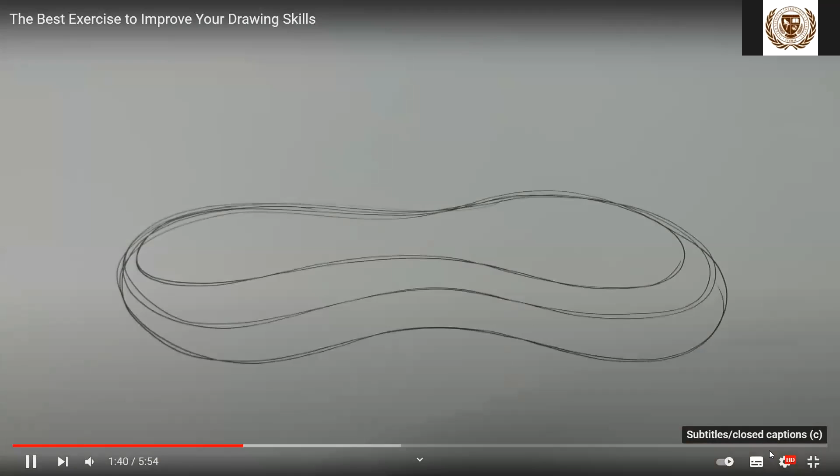It doesn't really matter what you draw, I'm just inventing this one as we go. The important thing is that your lines are continuous, not broken, nice and long. Let's add some holes, one on each side. Even these ellipses are made with continuous movements.

And I will shade the holes. The shading will be with short lines, but even these go from one end to the other. Don't stop in the middle, be decisive. Let's mark the cast shadow with one continuous line, and then shade it with parallel lines, which is also part of the exercise.

And I will darken the area of the shadow close to the object. Good, and we can add some more lines, as if it had an aperture or two, just to practice making more lines.

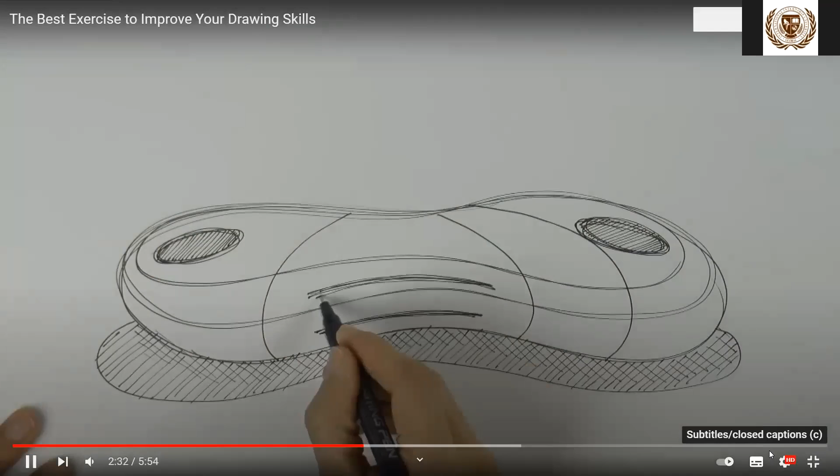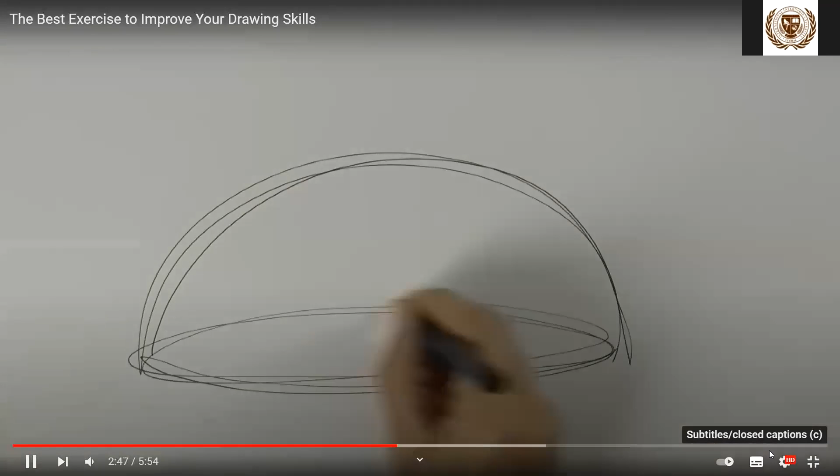Alright, let's get another one. Now a big curve here on the top, as if it were a dome or something. It really doesn't matter what you sketch. The important thing, again, is that your lines are continuous, that they are flowing, that you don't stop in the middle of a line.

Let's make some in another direction, like this, and we can reinforce the base, sketch the cast shadow, and fill it in.

Let's also shade the hole on top, like so. And I'll sketch something else over here, such as a glass or something like that, with two ellipses and then the sides.

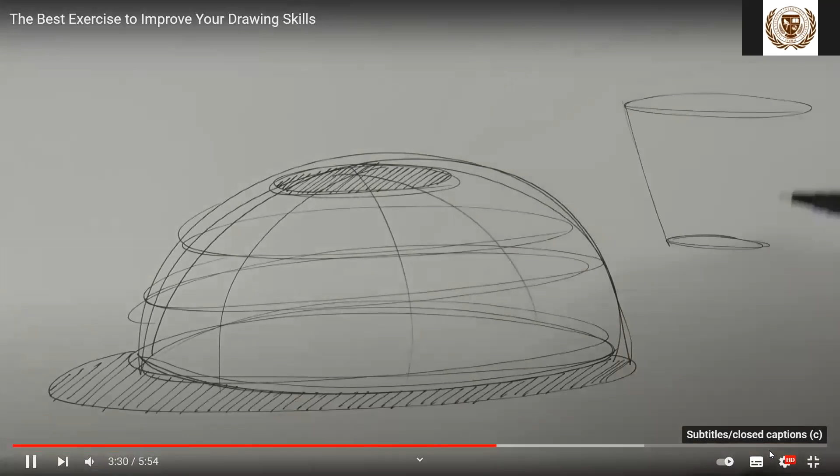So simple, but clean. And just for practice, let's draw some planes: 1, 2, and 3. By doing this, soon you will feel how your hand starts loosening up.

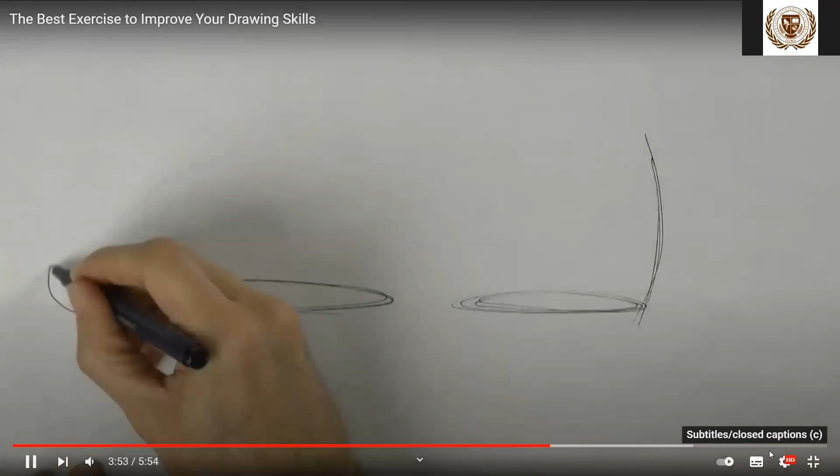Now I will draw a shoe, with two ovals, the end, and then a line for the overall shape, with an oval on top. This of course is not a real shoe, I am making it up as we go. We are just practicing making continuous lines, like this.

Good, now let's think about a futuristic vehicle. Very aerodynamic and with long continuous lines. Again, this doesn't need to make a lot of sense. What is important is that your lines are fluid, continuous, clean, not erratic.

Let's shade the windshield, add an air intake, a flap or wing over here. Very good.

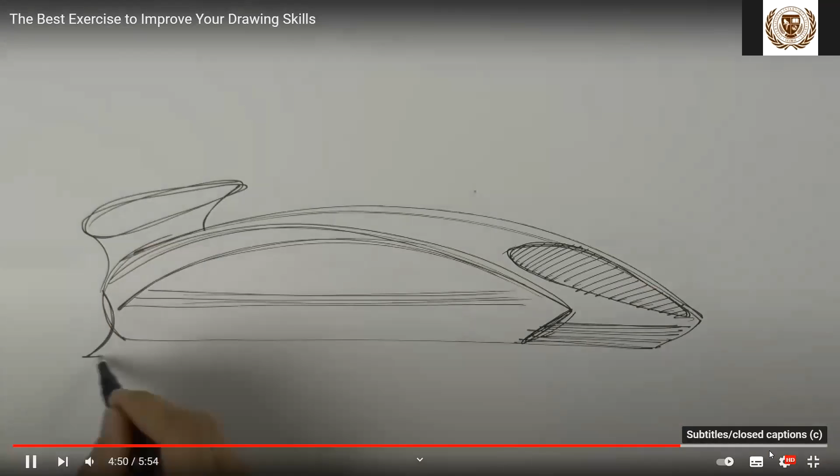Everything with loose, continuous lines. We can shade this, add something over here, and maybe redesign the lower part of it. I'm just playing around to practice making these smooth lines. I'll darken this further. Good, I think you get the idea.

Let's just make one final little sketch over here of a yacht. Of course, it is important for these lines that you hold the pencil or pen softly, not tight. And as we mentioned, do the movement with your whole arm. I recommend doing these exercises daily for a few minutes, maybe as a warm-up before you draw, and you will very soon feel the difference.

That is important, what we are starting on Monday. And because of that, we are making our works, if you remember, like this. We draw the line from top to bottom, horizontal, not like this, we move, and for 45 degrees. And we make a grid, and I told you, please, can you color in that part here? That is fine dimension, very detailing, etc.

Because of that, it's warming up our graphomotoric skills. And everybody in the world, if they want to be designers, they have this first activity. This is the first normal sketches as a child, then graphomotorics, and then coloring, because our brain works with colors. What's next? Research the market. We will see what is the best requirements for when you start designing, before designing, what we are doing today.

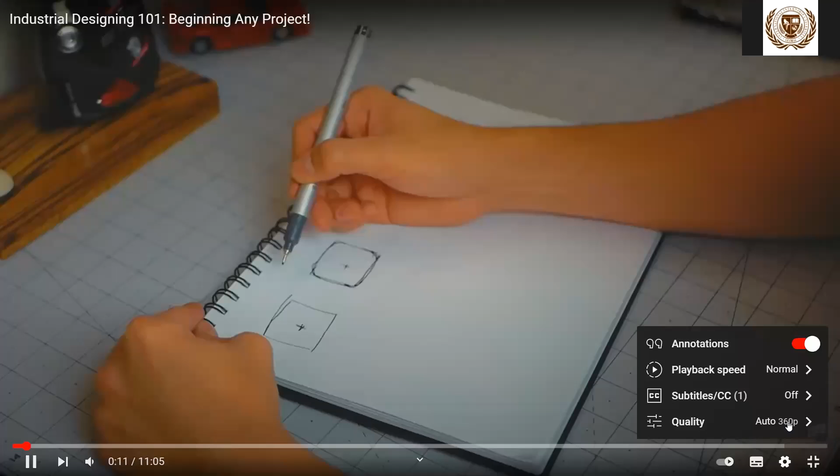Designers, I am showing you the full industrial design process by designing a fan. I'm going to be going through all of the different phases of industrial design and taking you along with me. Towards the end of this video, I'm going to go over the requirements, the constraints that we're going to need to stick to when designing this fan.

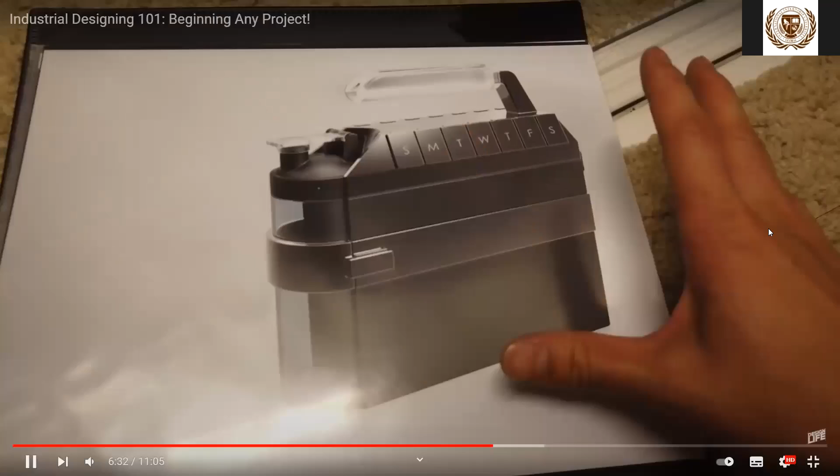This is the normal one, the black on gray silverish one, and then also black on red, because who doesn't love black and red? And then here's a close-up of the pill case. So what you do is these clip on and then you could just pop them up. There's the hero shot. Everything is shut. This is what you would normally see on an everyday basis. What I should have done too is also put it in a background, maybe the gym in the background, and it just kind of ties your product together in the context that it will be living in.

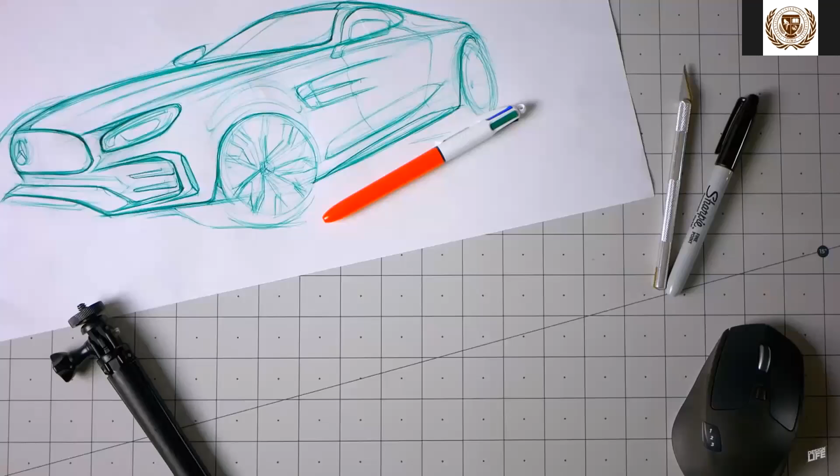Now, the 5 things that I really need to know before I begin a project are, number 1, the timeline. How long I have in order to work on this project. I need to know how long are they giving me. Since I've been doing it for a long time now, I kind of know how fast I work and the type of work that I can expect to produce within a certain amount of time.

Okay, number 2 is cost. Money and time go hand in hand. So I need to know how much money they're expecting this product is going to be. Is it a $100 item, is it going to be a $1,000 item? Is it going to be high end? If they tell me, oh, this is just going to be a very simple low budget product, I need to know this so it kind of narrows down the possibilities of what this project is going to be.

Then the competition. I need to know what are the other competitive products out there that they're looking at, that they think are actually really good, that they might want to add some features of into our product. I want to hear the things that they like about the competitors, the things that they don't like about the competitors, so that I know what to do and what not to do.

All of them are really important, but to me, when it comes to what to expect as far as design, vision is the most important one. I want to know what the client, what the boss is expecting. Competitors really help with that. It really tells me what they like and what they don't like. But I like to ask other things, such as their personal style, the different products that they like, certain things that other companies have done that they really admired. These are the things that I want to know in this vision category. I really just want to narrow down what they specifically are expecting.

Something that's very elegant and beautiful and glamorous, or something that's very bold and edgy and sporty and fast. A lot of the times they don't know, and that's a good thing to know too. If they don't know, then that means it's up to you to contribute. And we all know that a product can go in every single direction. It can be bold, it can be subtle, it can be very trendy. And my philosophy is that you need to be a really good listener. Hear the things in between the lines so that you can increase your chances of success by giving the person exactly what they're looking for, or maybe even more.

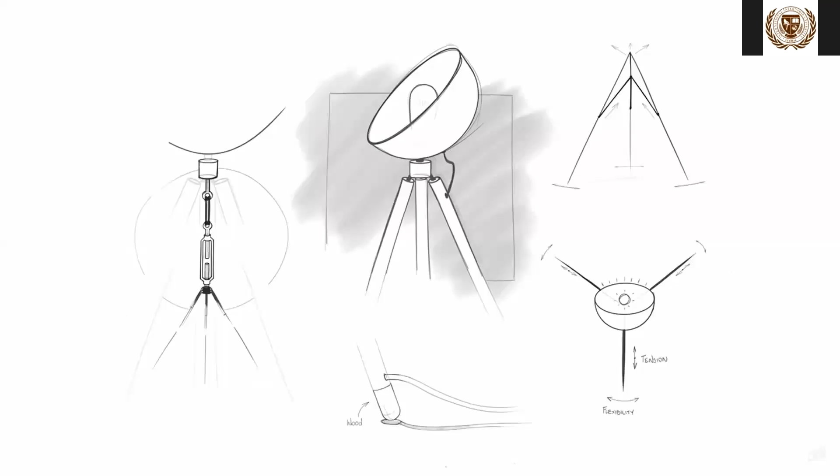A lot of people like to see just the different ideas that you actually considered. They decided to sketch in gray too, and personally I sketch in blue, so you don't always have to feel like you have to sketch in black. This is another great way to show off your sketches, is to just take a picture of it at an angle and maybe just have your pen in there instead of just scanning it in like this example. But either way works. It's really just up to you.

And I really like this sketch right here because most people think that in order to draw a good sketch, you've got to kind of overcomplicate it and add a lot of detail, but this is really simple, straightforward. I can understand it right away. Being able to sketch well and quick is really about mastering how to draw the very basic geometric shapes, stuff like pyramids and spheres and cubes and cylinders. Because if you carefully observe products, most of them are based off of these forms. The general form of the product is based off of these primitive shapes.

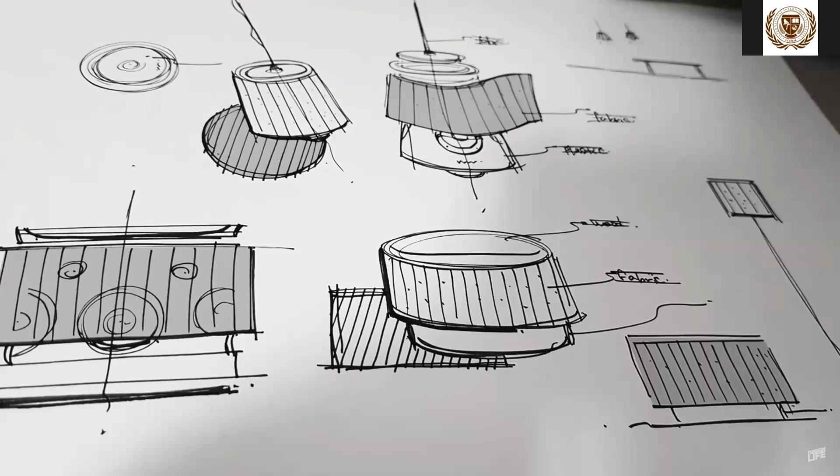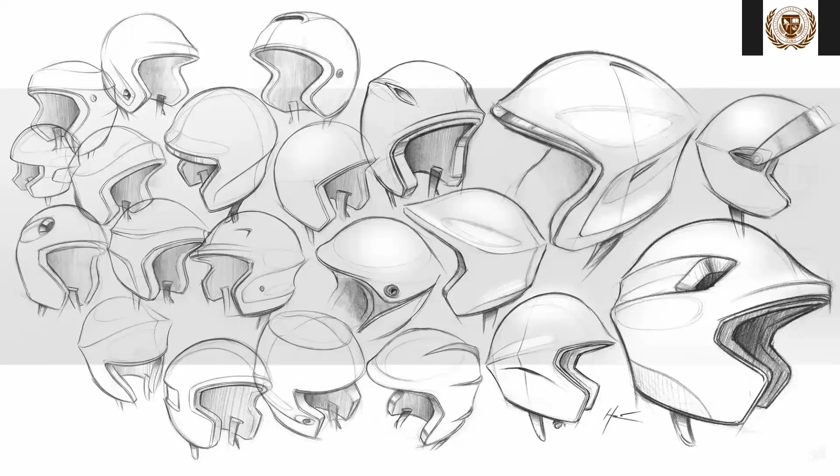So now with tablets and sketching apps, you don't have to draw with a pen and paper. You can do it digitally. And I think this is a great example. Again, it shows off the straight-on orthographic views like I talked about. And I really like it too because you can just render in really quick, just like a marker, and it just adds so much more to the sketch. So this is a very standard way of showing off your sketches.

You know, you just have a bunch of sketches, you scan them in, and you compose them all together. And it gives you a really cool looking page, but I gotta tell you guys, if you're gonna be doing it this way, it's gonna be very time consuming just because you gotta scan everything in, you gotta remove the background, and you gotta compose it all together. And the hardest part of this one is to just make the background completely consistent color. Kind of like this one here where they scanned everything and composed it.

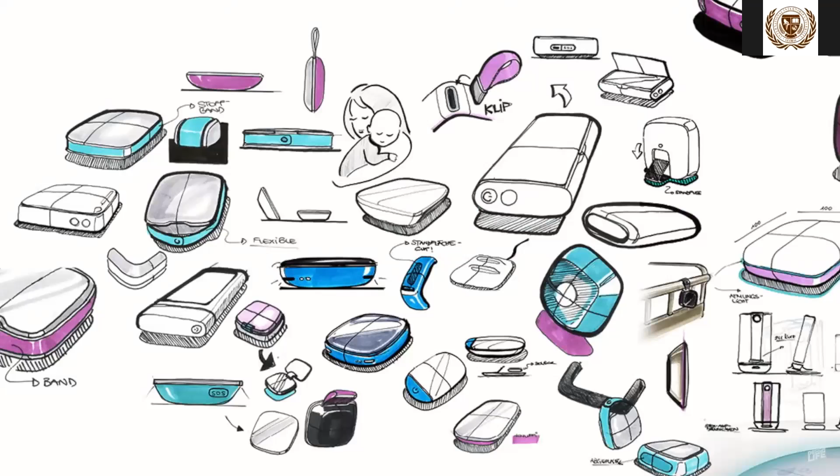I like this one just because they have 3 different groups, kind of telling me that, oh, they design things in phases. And I liked how they render things every once in a while, kind of just showing that they're experimenting with certain ones, they're trying to explore ones a little bit further.

So this here is just another simple digital sketch, but what I wanted to focus on was the industrial design style. What we tend to do is we like to draw the lines even past the object, and it just kind of adds a little more style to it, a little more emotion, and it's a great idea to develop your own style and stand out from the crowd of industrial designers, but always again keep in mind that sketching is all about trying to be as clear as possible to represent your ideas. Just don't go too overboard with it, because that really defines the industrial design style versus, say, an artist or an illustrator.

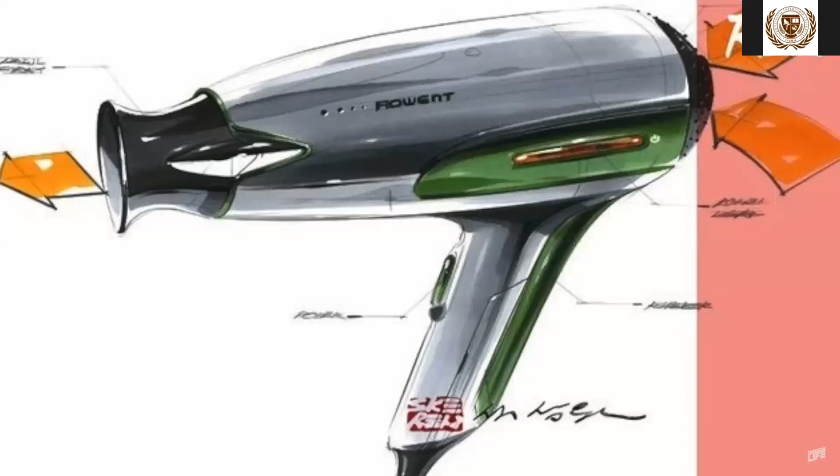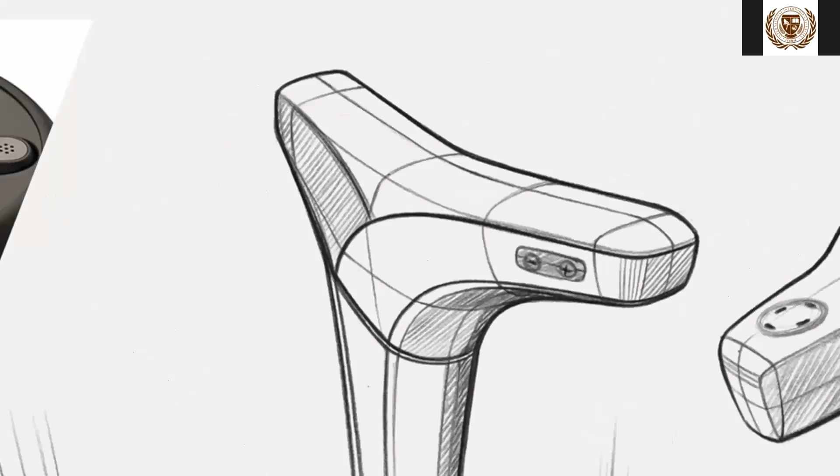So since we're on the topic of style, I love looking at Skeren sketches, and you guys can see that there's a specific style to it. It's very expressive and emotional, but at the same time, you could still understand the forms and what the product is. And honestly, that's the main reason why I like looking at designer sketches over any other type of style, just because the designer and the sketcher has really considered the form and showing it off as clearly as possible. Just like what you guys see here, they also use contour lines to really help show off that form. Definitely something that you guys can use.

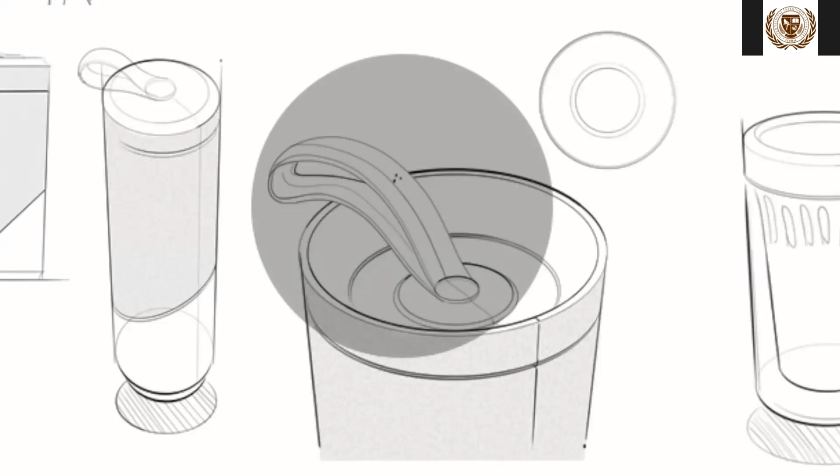So this sketch and presentation is actually very interesting to me just because, you know, it's very common for us to bunch in a ton of different sketches in a small area. And so how they were able to have things stand out or have the viewer focus on a certain detail is that they spotlighted certain aspects of their sketches, which is definitely something that you guys can also do.

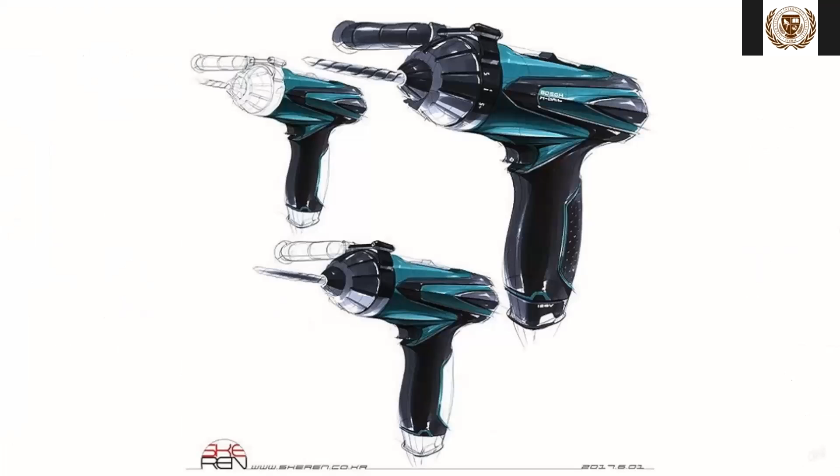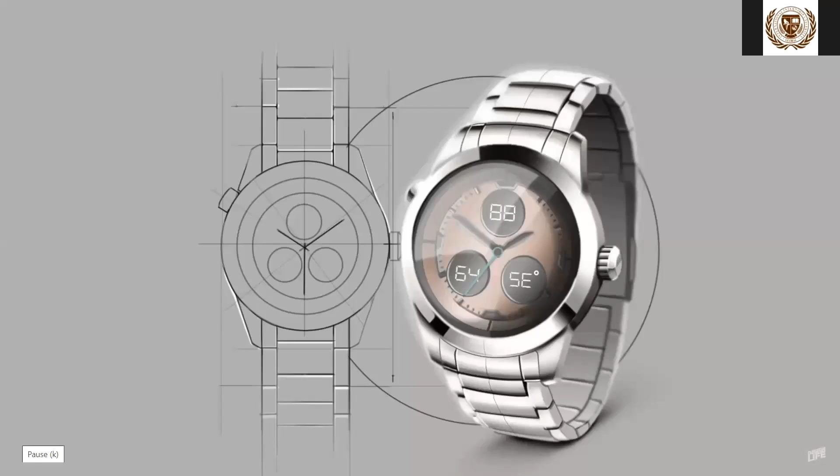So I'm going to wrap it up right there, guys, but sketching is such a huge topic in industrial design, so there's probably going to be a part 2 and a part 3. Main thing I wanted you guys to take away from this video is to crush that idea of trying to draw a pretty picture. That's not going to make you a good designer. You're totally missing the point if that's what you're trying to do. Sketching is such an incredible way to show off your ideas in a very fast and quick way. It's kind of like when somebody writes something down to figure out their thoughts. You're trying to sketch your ideas out, trying to figure them out, work through your designs, figuring out what's it going to look like, how's it going to work.

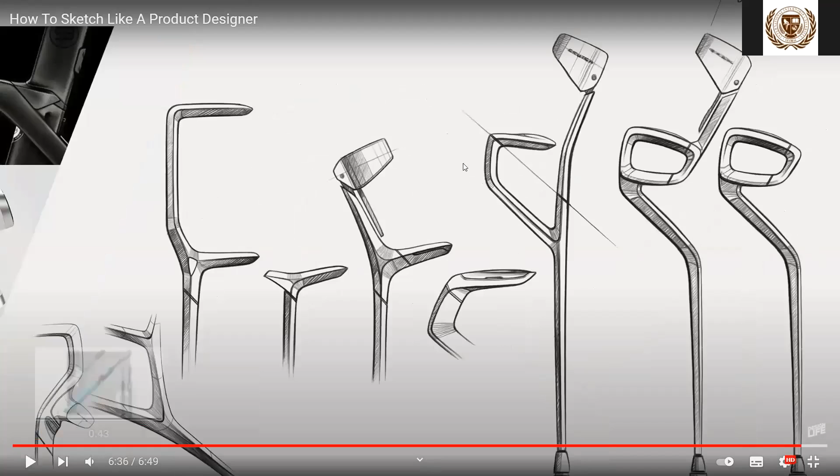Definitely. And because of that, you must warm up your hand. And because of that, you must work every day, not just listening, because industrial designers and product designers work every day. They practice every day. They sketch in the tram, they sketch in the waiting room at school. They sketch all the time. They have lots of papers of sketching.

And here, wait a minute. Yes. Here. Oh, I think, okay, sorry. I clicked some other buttons.

Here, we make a sketch of the project, revealing its essence. Seek a color decision, properly balance the composition. We speak in visual elements. Display any shape and material that we research in the market, and create bright and expressive sketches. And you must sketch every day, not just "I will start next Monday." Convey information to the viewer, show the color scheme of the project. We made the color scheme in a mood board.

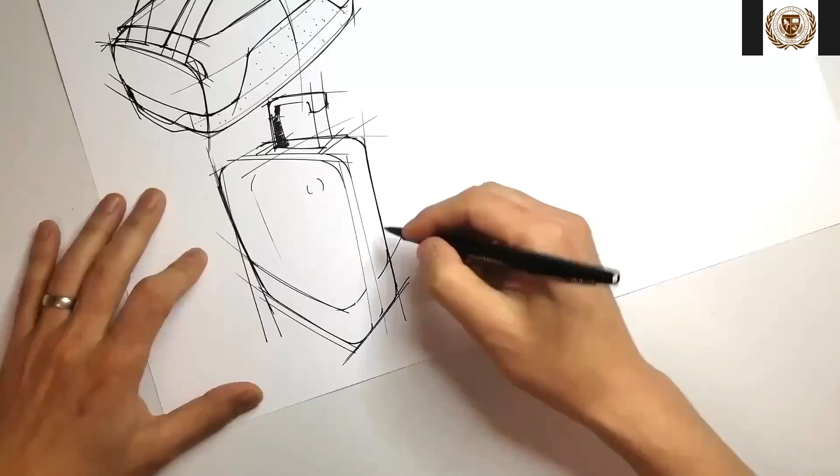The sketches are very loose and mistakes are everywhere, but that's okay, since the main purpose for these drawings is for me to communicate my ideas with other designers. For example, the marketing department communicates with their customers by using words, and the accounting department uses numbers to communicate. And designers, we use drawings to communicate. So simply, drawing is a tool that we can use to communicate with other people.

We have a 10-people design department, and we show our drawings and ideas to each other every day. You don't have to have perfect sketches. Chances are you will most likely revise your drawings and ideas after a meeting or talking to other designers anyways.

But the one thing that I have to keep in mind is that people react to your drawings first, and then they will look at your ideas. So if there's something wonky going on with your drawing, or if the perspective lines are incorrect, people will focus on those mistakes instead of your ideas. So even though I said that concept sketches can be very loose, I will try to make them somewhat presentable.

So once I am done with step 1, I will try to pick my favorites and then move to step 2. So step 2 is my design variation stage. Once I review the first concept sketches with other designers, I will make variation sketches based on my favorite concepts.

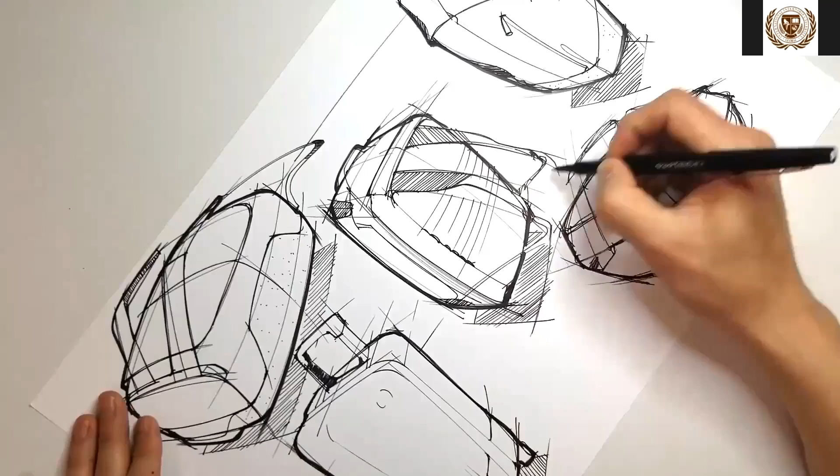Sometimes I will freehand those variation sketches, or I will use a computer to make more options. The main difference between step 1 and step 2 is that step 2 variation drawings are not that different from each other, since these are based on a selected concept, and just small tweaks are made to narrow down the concepts. And I'm also working on potential components and materials that I can use for the production during step 2.

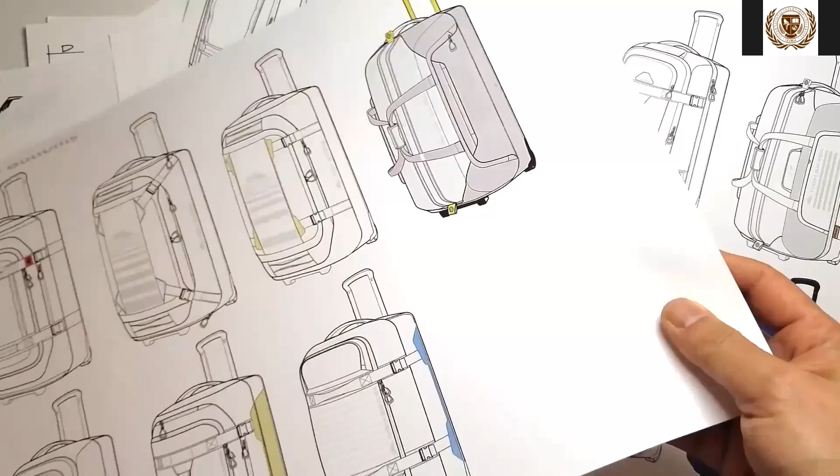So once I select like 2 or 3 final concepts from step 2, I will move to step 3. Step 3 is a final presentation. I will make more refined renderings so I can present them to upper management or our buying team. So once I have a green light to move forward with the production, I will move to step number 4. Step 4 is a specification.

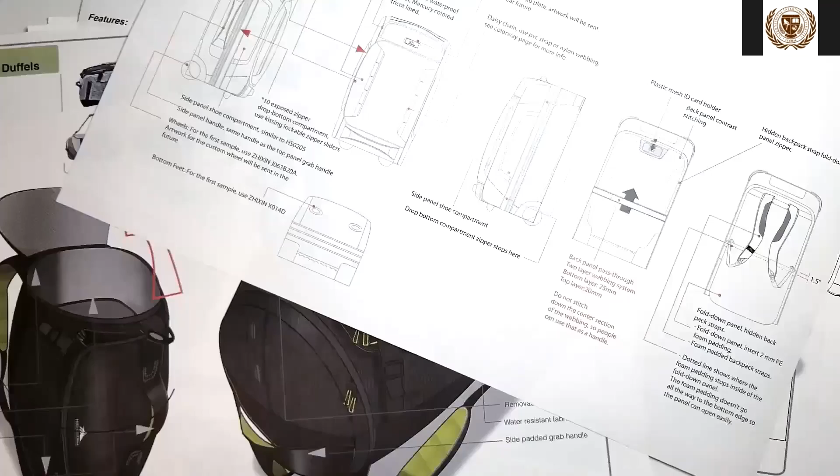This is where I use my drawings to communicate with our overseas factories. And these are engineering drawings with orthographic views, detailed specs, and components list. So after these drawings are sent to our overseas factories, about 2-3 months later, I will get to see our sample. So sample is step number 5.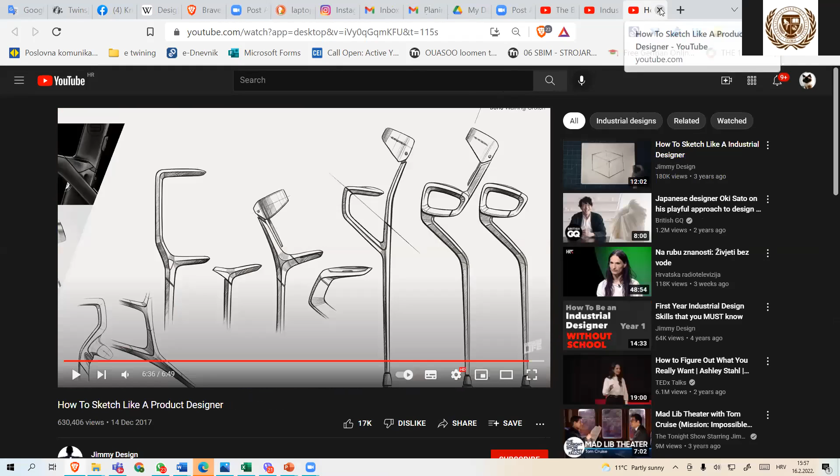That was our task today. How to draw and what are the rules. Welcome back to another Industrial Design Fundamentals. What are the rules and what is most important to put in your drawing. It can be from a child's design. It's no problem. But if you don't put any information for the producer... here, you see, those are components of travel lights.

And here, if we read that design, you will see it comes in 4 different colors. Bendable neck, okay. A 2 in 1 phone charger you can have here, and that is a holder for your lamp. Here, how you connect the removable piece with magnets. You see, here is the magnet, and you have an explanation of how the product works.

Do you know how old this product designer is? 11 years. That girl goes to 7th grade, and she made that in 3 days. That is amazing. She has the power to sketch, to research, to make all this in 3 days. Excellent. And she thinks with all different resources. How can she make this? 2 ways of charging, with a solar panel and plug and play in walls. And it's designed for trips, camping, travels.

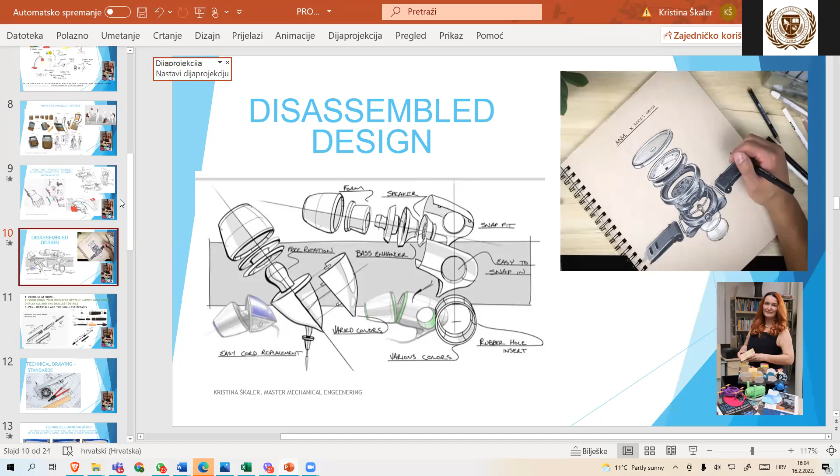Exercise time. You will make your drawing, exploding your upcycle laptop table and all its functions, down to the smallest details. Please, that is our today task. Just take the pencil and draw like this.

Here is task two, B. Can you draw the pen near around you? If you don't understand how to draw the laptop table, you can put all these parts away and draw everything on paper with the pencil. It's simple, not a heavy task for those watching our workshop. You can make all this, and that is our second task.

First task, can you make it on A3 paper? On A3 paper, please sketch what your table is. What is inside? Where is the hole? Where is the hub? What material does it have? Do you put LED lights here, etc.?

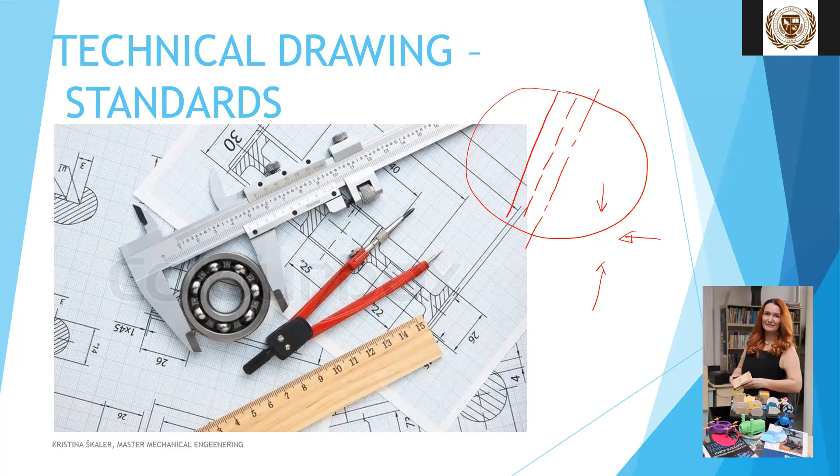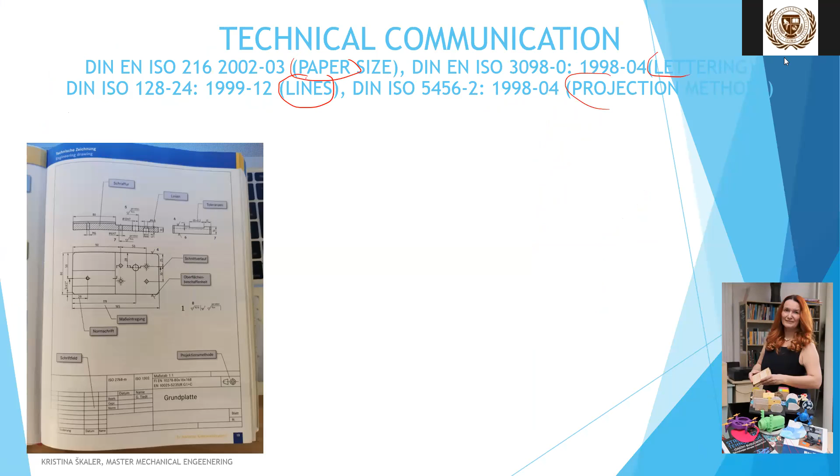We have technical communication standards: what is the paper size, standards for lines, for lettering, projection methods—everybody in the world agrees on these, including schraffur, lines, tolerance.

Here you see what we put on the table for projection methods. Everybody can search the internet for the meaning of each line—what a light line like handwriting means, what a broken line like this means, and the thickness of that line. The designer must know everything about this, because the producer who will make your prototype must understand what you are drawing, and that is important.

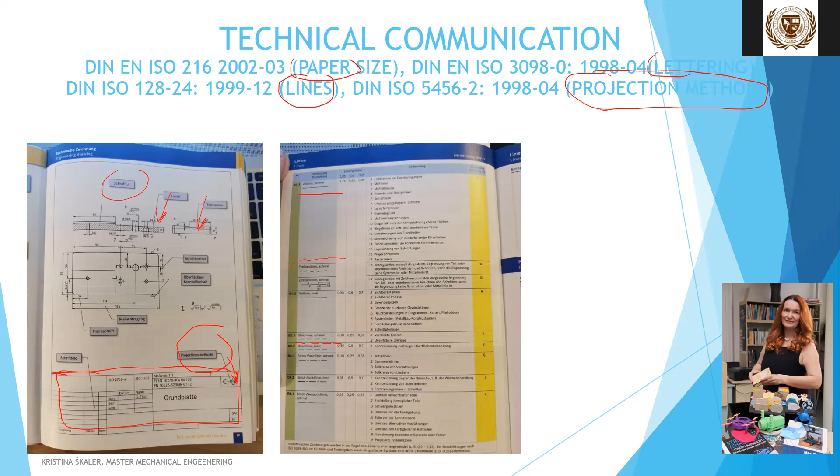Now, what is the view? You see this in YouTube videos with lots of viewing angles, but if we agree on the world scene, what is the top view? The top view goes here. From the top we make it here. From below, if we're looking from underneath, we put it here. Front view goes here. Everything is explained.

Anybody from India, Australia, Malaysia, or Russia looking at something knows where it is on the real product, and they can produce the same thing. If we don't have standards, we will make big mistakes, and because of that, we have standards.

Wait a minute, let's agree on something first: first angle, third angle. First angle projection is used in Europe, maybe Russia. In India it's third angle, or maybe Malaysia. In America and in the UK it's also third angle.

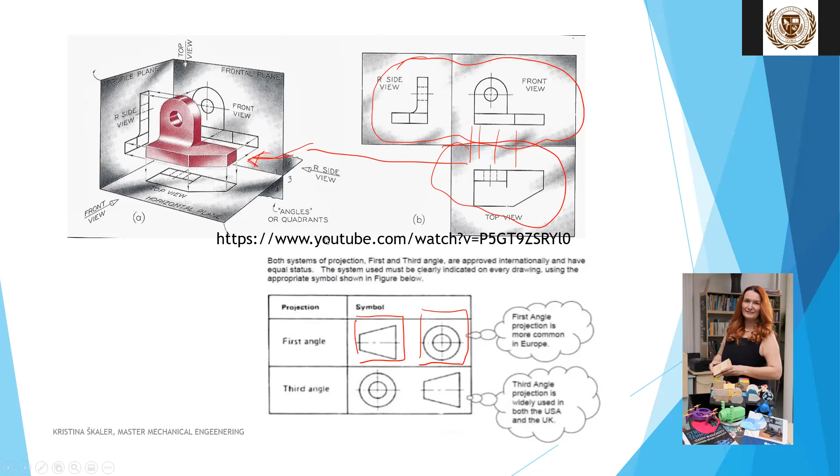Because I have something to show here. We must know the standards of designing, the standards of mechanical engineering, because of that we can communicate across the world. I can produce something with Indian colleagues because we have the same standards, and because of that we can design in Europe, manufacture in China, assemble in India, and sell that product. Because of that, all of us must know the standards.

Here's a beautiful example. What is missing if we don't understand this standard?

Let's get straight to the point. Today we're going to be talking about what is GD&T. Now, if you're in the mechanical design or manufacturing world, chances are you've heard of GD&T, maybe from a classmate, a professor, a coworker, or maybe even your boss. Either way, you're wanting to know more about GD&T.

Before we can really grasp what GD&T is, we first need to understand a few critical concepts. The first concept is this: parts are not really useful by themselves. Now you might be wondering, parts aren't useful? Of course they are, that's why we design parts, that's why we manufacture parts. What do you mean? Well, here's what I mean.

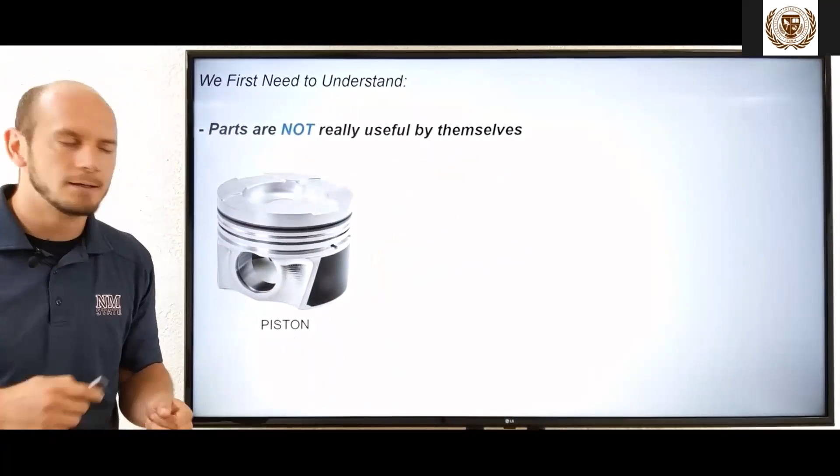Let's take this piston, for example. Let's say I take this piston by itself and just hand it to you. Is that piston by itself really useful? No, it's not. Same thing for this connecting rod and this wrist pin. It's not really useful by itself.

So the next concept we need to understand is this: parts are typically put together with other parts to make a useful assembly. If we took that piston, connecting rod, and wrist pin - all by themselves not very useful - but if we put them into this assembly, now all of a sudden we have something useful. We could then take this useful assembly, put it into a larger engine assembly, take that engine assembly and put it into an even larger vehicle assembly, and now that vehicle, as an assembly of parts, is useful to us. So again, parts are typically put together with other parts to make a useful assembly.

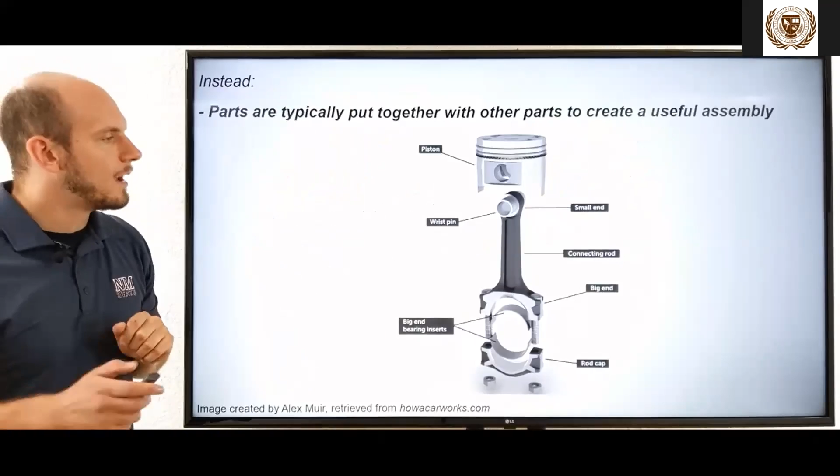The last thing we need to understand: traditional dimensioning and tolerancing that we're all used to seeing and using does not guarantee your parts will fit and function at the assembly level, which is where your parts are really useful. So there's some glaring gaps in traditional dimensioning and tolerancing.

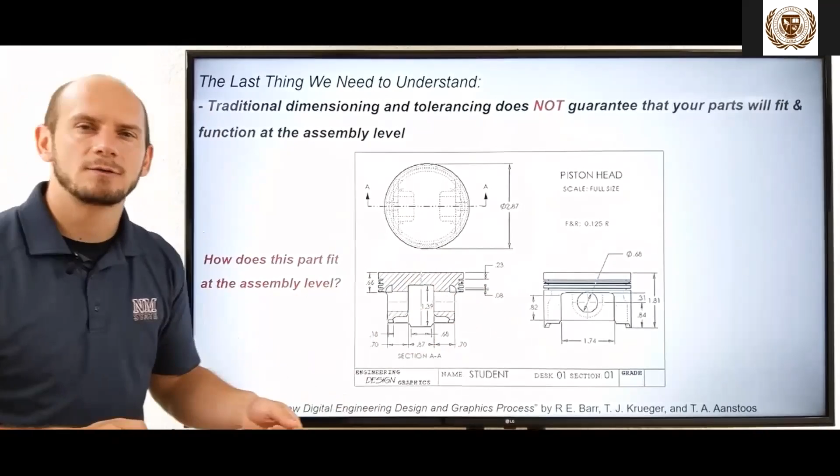Traditional dimensioning and tolerancing, like what you might see on this drawing here, only gives individual part and individual part feature information. It does not tell you how this part fits at the assembly level. Traditional dimensioning and tolerancing doesn't tell you how this part functions at the assembly level. So there's some gaps we need to address.

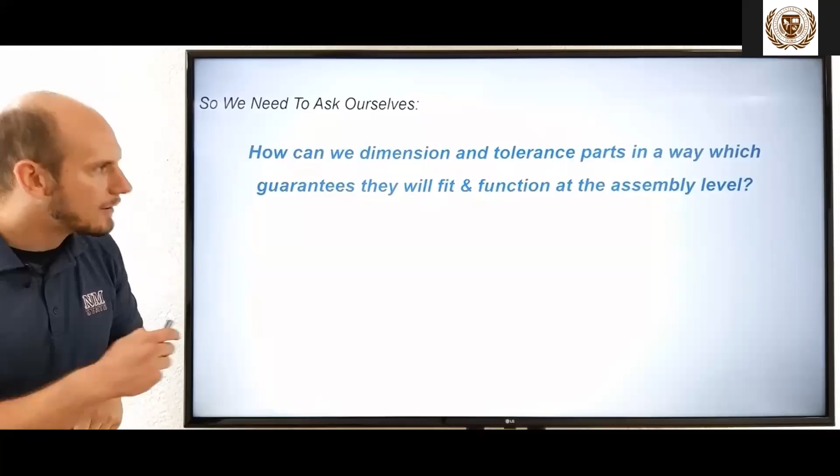So with that, we need to ask ourselves, if traditional dimensioning and tolerancing has some gaps, how can we dimension and tolerance parts in a way which guarantees they will fit and function at that assembly level? How do we do this? By using GD&T.

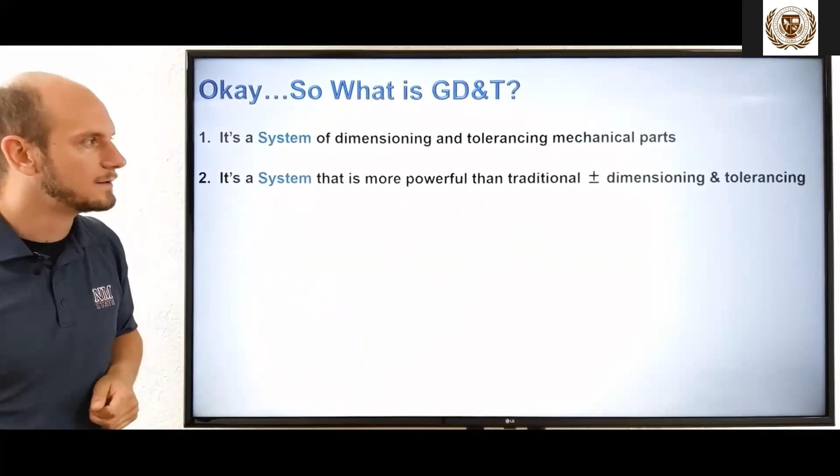So that's what we use GD&T for, but you're probably still asking yourself, what is GD&T? Well, number one, it's a system of dimensioning and tolerancing mechanical parts. Number two, it's a system that's more powerful than that traditional dimensioning and tolerancing we're all used to seeing and using on our drawings. How is it more powerful? Well, it's more powerful because it's a system which allows you to know with 100% certainty that your parts will fit and function at the assembly level.

Number four, it's a system. So of course, with any system, we need to learn some vocabulary, understand some definitions, follow some rules, and then once we do those three things, we can start to apply predefined symbols to the face of our drawing to help convey our design intent for our parts and part features.

And these are some typical or common symbols that you'll see within the GD&T world right here.

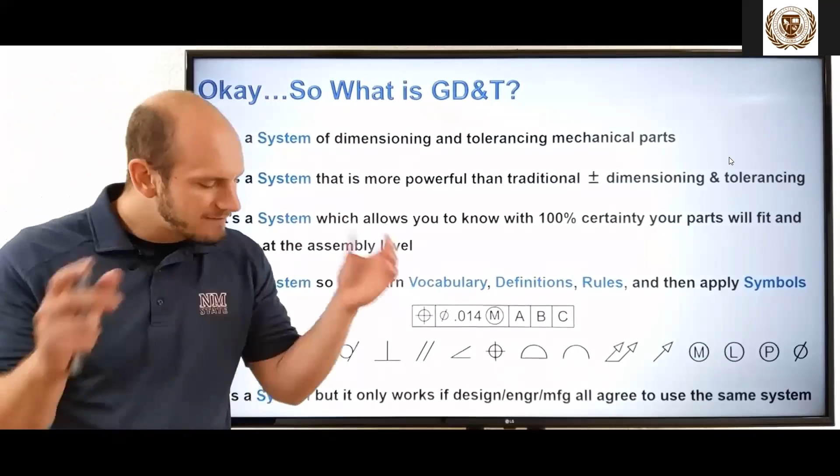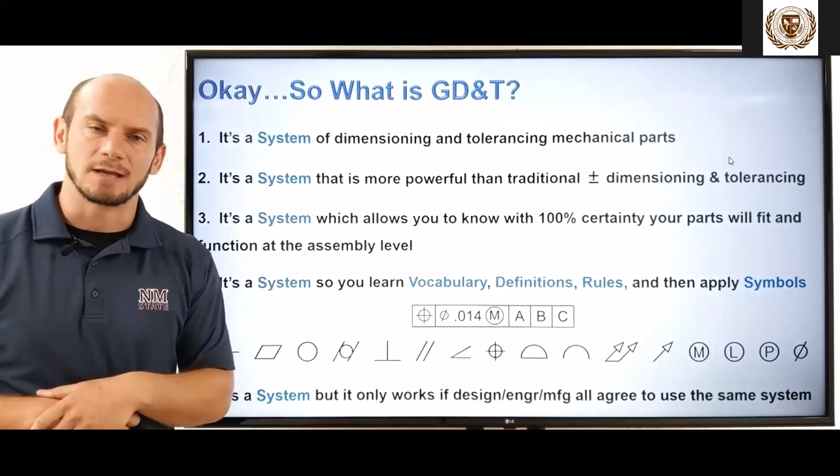All right, the last note here. It's a system, but it only works if everyone involved agrees to use the same system. What do I mean? Well, the design people, the engineering people, the manufacturing people, such as the machinists and the inspectors, they all have to agree to use the same system. If a sports game happened but the teams couldn't agree to the rules, you'd never have a successful game. So it only works if everyone agrees to the same system.

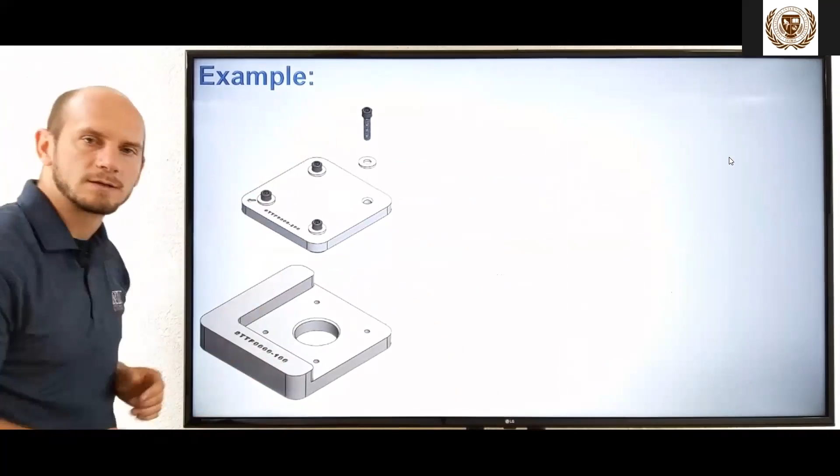All right, let's now look at a practical example. I have this pretty simple assembly. I have a top part and a bottom part, and I've got this hardware holding it all together. Now in this assembly's assembled state, this is what it would look like. Now I want you to notice a few things in this assembled state.

First thing, we've got this interface or mating surface right here, that flat surface where those parts come together. I have another interface or mating surface right there where this top part sits against this ledge. And then I have a third interface or mating surface right there where this part also slides over and sits against that ledge.

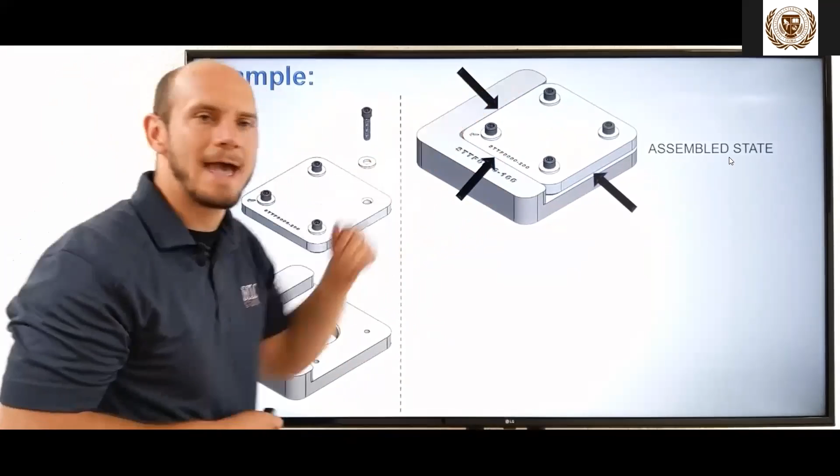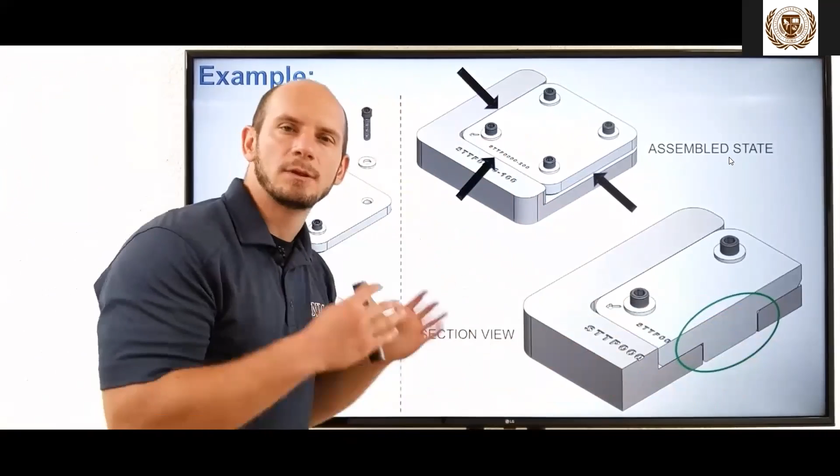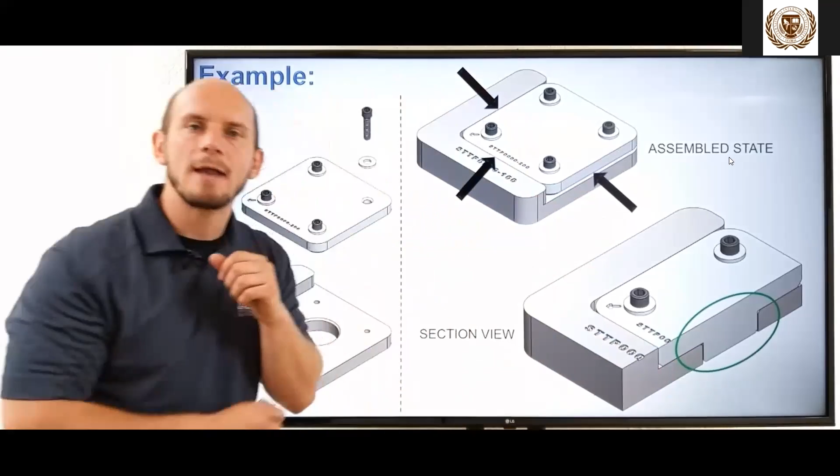Another thing, if I was to take a slice of this assembly and look at a section view, it would look just like this. Now you'll notice in this section view I've got a critical assembly feature. What I mean by that, this extruded boss must fit inside this bore. If it doesn't, these parts will not come together. They will not fit and function properly at the assembly level. So I've got this critical assembly feature and these interface or mating surfaces that we want to look at.

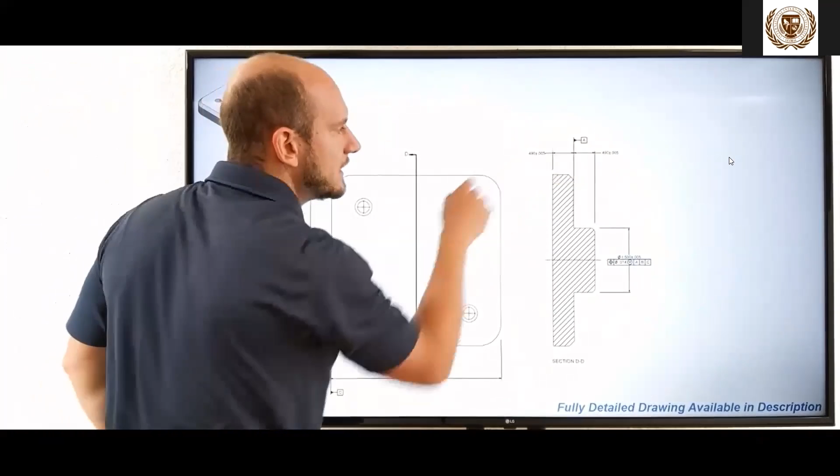So now let's look at the top part. This is some common views you might see on a drawing for this top part. I've got my top view and my side section view. You'll notice I do have some traditional dimensioning and tolerancing here, as over here as well, to denote the overall size. But when it comes to that critical assembly feature, I'm also adding GD&T. By adding GD&T to this critical assembly feature, I'm guaranteeing that feature will fit and function properly at the assembly level. Also, I'm identifying those interface or mating surfaces on my drawing as well.

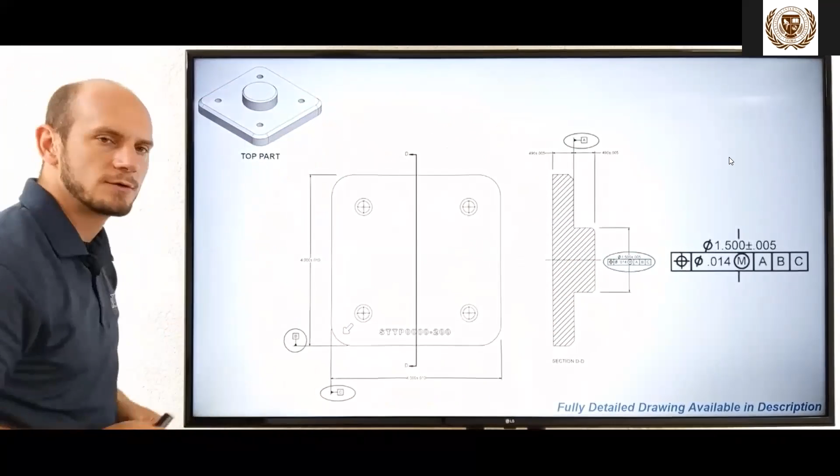Now this isn't all of GD&T, but this is a really brief introduction to the symbols that you'd put on your drawing and what you'd apply to your critical assembly features. And you can see the fully detailed drawings if you look in the description below.

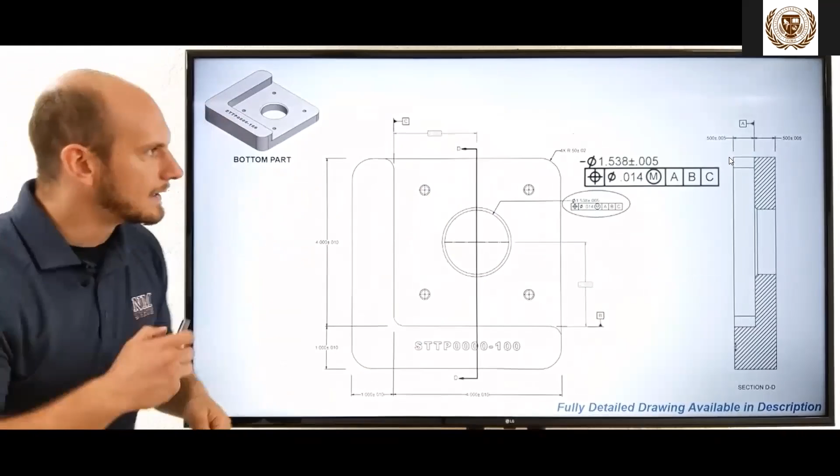All right, really quickly, let's look at the bottom part. Same thing here, guys. I've got that critical assembly feature, which is that bore. And because it's a critical assembly feature, I'm applying GD&T to it. Again, I'm also identifying those interface or mating surfaces on my drawing as well.

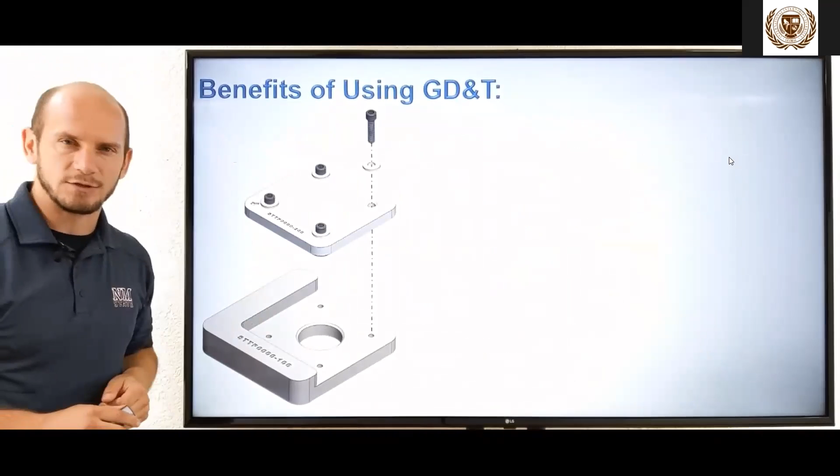All right, so now we know what GD&T is, kind of real briefly how it's used. What are the benefits of using GD&T, or why should I use it? Well, number one, you can be 100% certain that your parts will fit and function properly at the assembly level.

Number two, you're going to save time and money because you're going to reduce the number of design to manufacturing to test fit cycles that you have to perform, because your parts are going to fit and function properly the first time around. The last one, you actually convey your design intent to the machinist, the inspectors, as well as the future designers who inherit your drawings and your designs.

So if the machinist, inspectors, or these future designers pick up your drawings, they can see your GD&T, and right away they'll understand the fitment and the function you want at the assembly level, and they can get rocking and rolling and start to do their work.

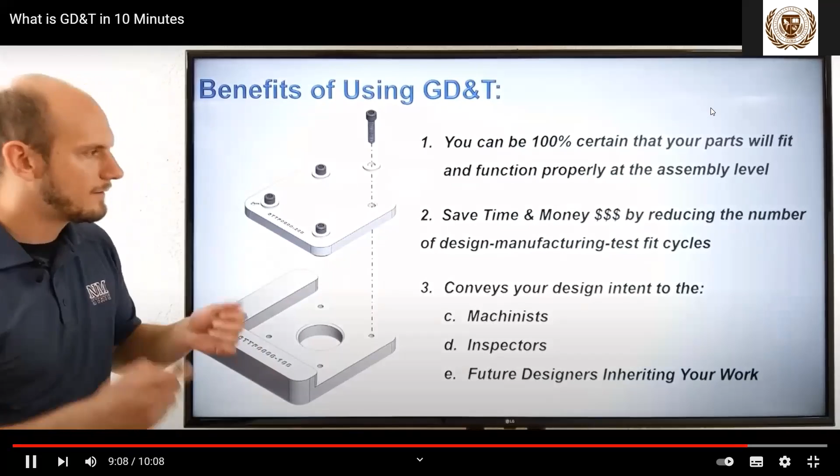All right, those are the three big benefits of GD&T. However, guys, number two, that's your big one. That's your selling point right there. You're gonna save time and money. All right, that's the benefits of GD&T.

One more time, what is GD&T? GD&T, it's a system of dimensioning and tolerancing mechanical parts, which allows you to know with 100% certainty that your parts will fit and function at the assembly level where those parts are actually useful. And it's a system from the American Society of Mechanical Engineers.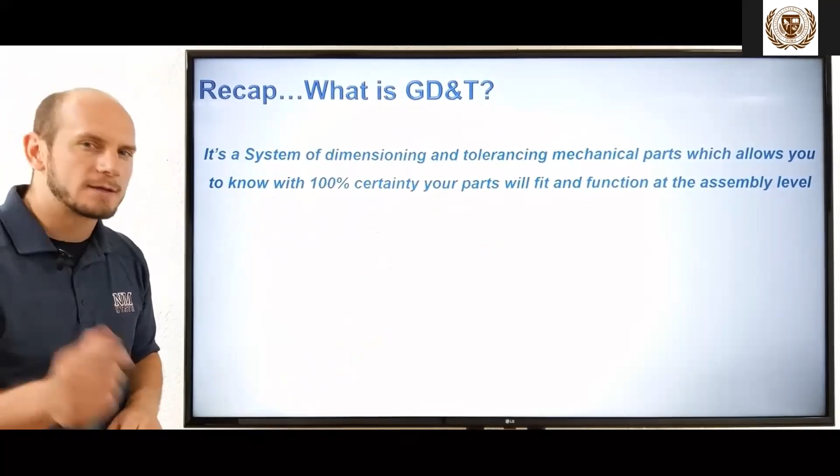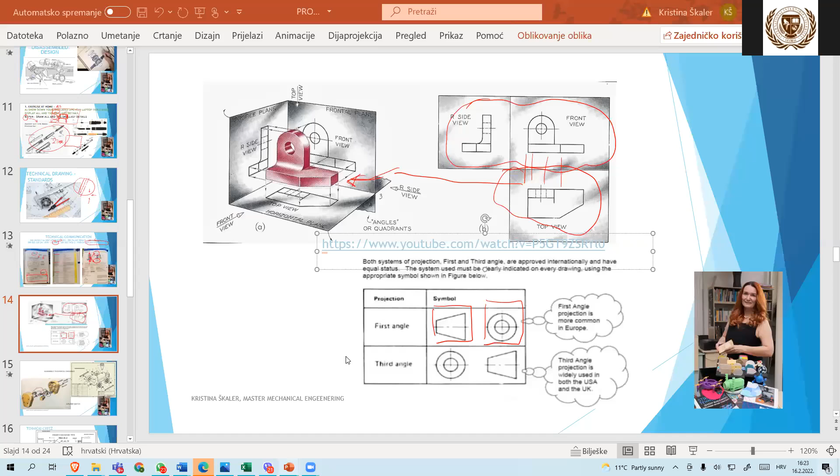Excellent explaining what is that tolerance, but I will say that we in Croatia, for the last 100 years, we know that, because that is not American innovation. We have DIN and ISO standards. I will show you here. And that is tolerance of geometric shape, form, and location,

GSFL. Okay, that is in ISO, International Standard Organization, and Deutsches Institut für Normung. DIN and ISO were connected in the 1990s, but before we had DIN separately and ISO separately, but they all have that tolerance of geometric shape, form and location. You see, that is the number.

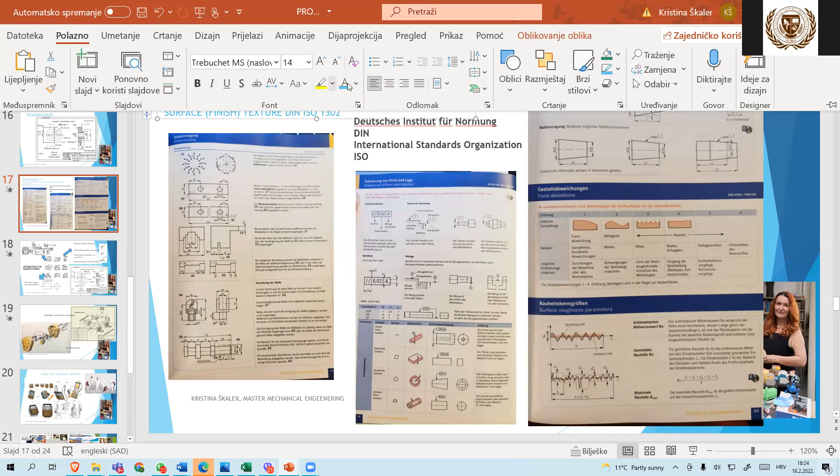Everything is transparent. I will make it bold and a different color, and you will see if you search that, you can search the international standards, and they were made much earlier. And you will see how it's different here in the middle. That is explaining the rectangle, the flatness, the

concentric circles, etc. All these, you as designer, you must prepare for the producer. You see here, we have an assembly technical drawing. Here, that is technical drawing. Here is an exploded sketch by the designer. But how you will fit your parts and your switches and your details, you must think before. Not make the loop: designing, machining, testing.

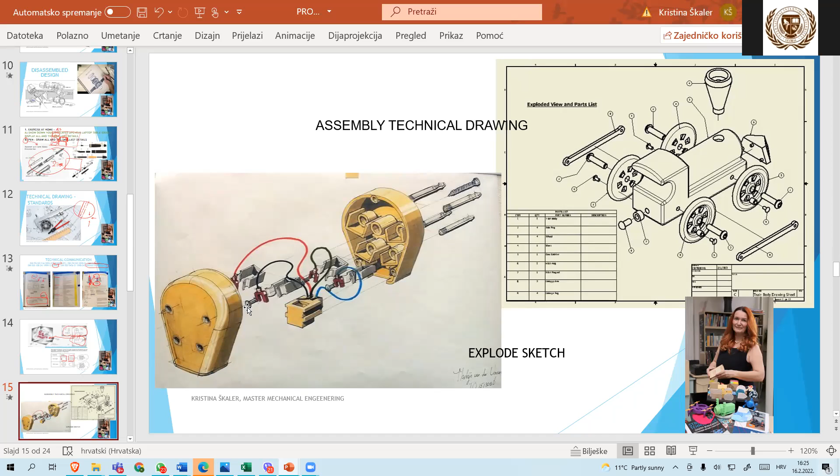Again, designing, machining, testing. When we change designer minds, please take care about this tolerance, and you will produce much better quality. You see, on the drawing sheet we have some usual standard tolerance, dimension and tolerance. We have cutting plane here, front view, side view. We have some border, we have some title.

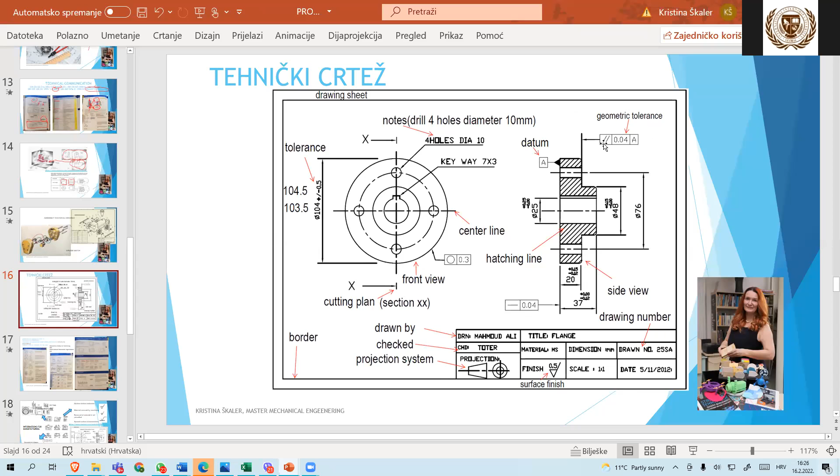We have geometric tolerance. You see, parallel. This is the symbol of parallel, and the number is the tolerance here, and here is the base A. The base A is here, tolerance number is here, and that is the symbol of what we want from that shape form. Parallel. We need this part to be parallel with that base A.

And we have here one more connection with texture and, wait a minute, material, surface finish. We have here a technical drawing for the manufacturing, for producers. We need to explain what surface we want as designer. All this information is the technical drawing, documentation, and standards.

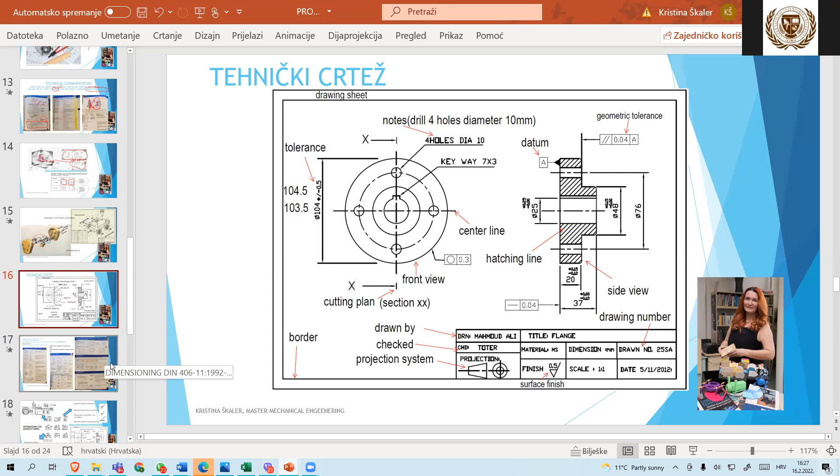And because of that, the good product designer must have all that information, not just an idea on paper, with tolerance, dimensions, specifications, information for others, how they can produce that. And we have a little more. I said we have how you make the dimensioning, how you put your dimensions in your drawing. We have standards for that. We have that tolerance of form and location.

That is G, S, F, and L. We have it in international standards, that is not American, but he was good in explanation. What is this? And we have all tolerance of shape, form, surface, roughness, etc.

Here I want to connect that video with my design. If I put something on my drawing, I must think about fitting. I must think about surface texture. I must think about that geometric shape and form. That was called G, S, F, and L. Yes, that is its acronym,

and that is circular tolerance like this. That must be circular, not oval. And all this information is important for manufacturing. If we don't have that information for our producer, the worker on the machine, our shape, our design is nothing to them. And that was important for the product designer. He or she must think how to produce that table from different materials.

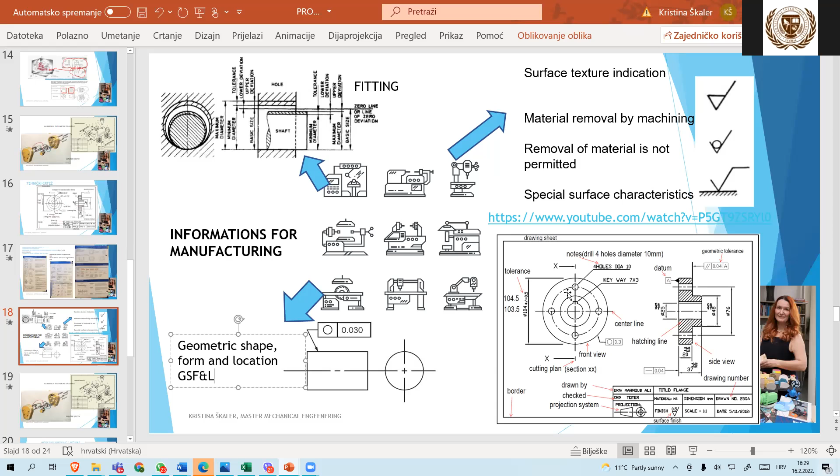And we are at the end, we have only 4 slides. Don't worry, I will make it on time. No, it's not a problem.

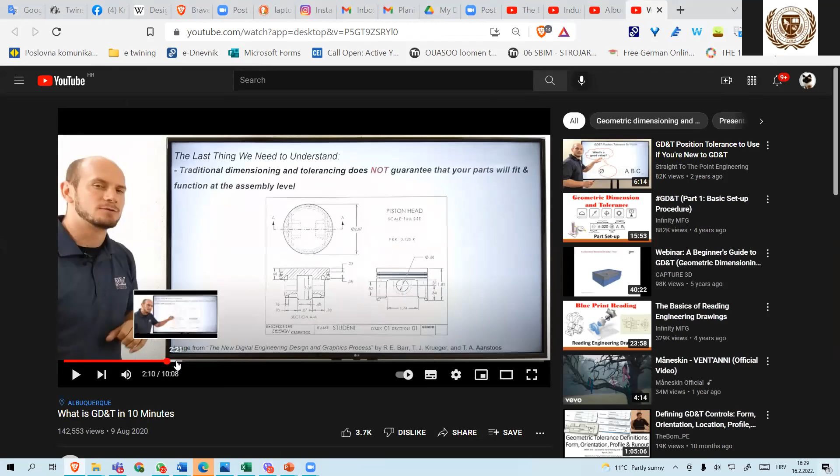Do you understand now why that is very important and why we must understand this? Because if we put in our assembling drawing all the parts and we don't have that information, we can assemble different parts without that information. Tolerance. That is here.

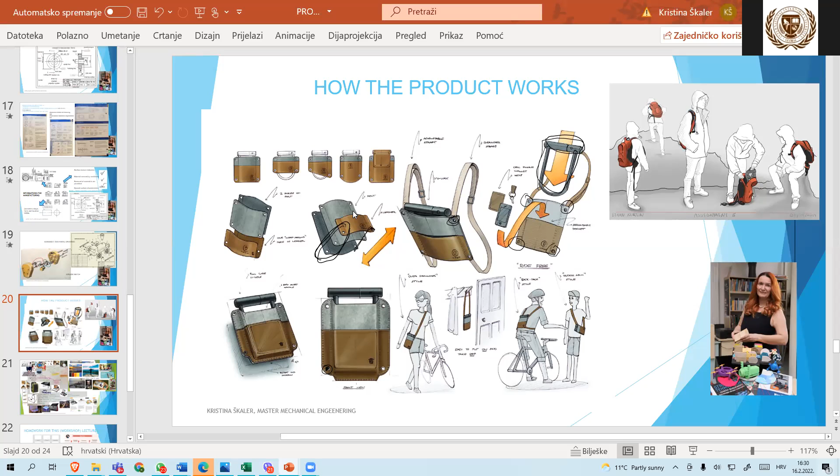You see, that locker is not light, that locker is very heavy, and you must think about how it will be possible to put that inside and not break it. And that is important when you're drawing and understanding this.

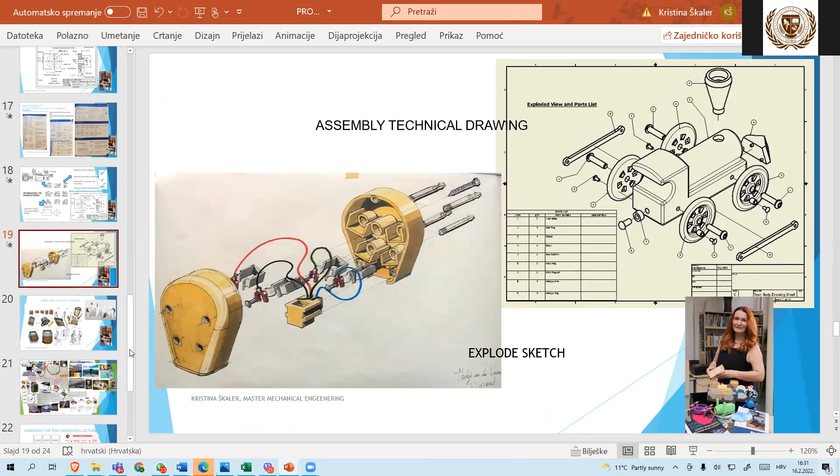Because of that, when you research, when you make all this coloring, texture, and what material you have, what is the manufacturing, how you can make that laptop table, what you put in this, what is the extra functionality you put on your table, all this information develops your idea in design. And you must think about all of these, and don't miss how you will draw on your paper with the golden section.

It's beautiful for our eyes, and we just recognize, oh, that is a very nice design here. And what is the information of our consumer? If he or she has a problem, special needs, we will make everything for them. We will make it like a magician.

And for that, I think that is the Precious Plastic I want to show. That was an amazing upcycling idea. I think so, that is here.

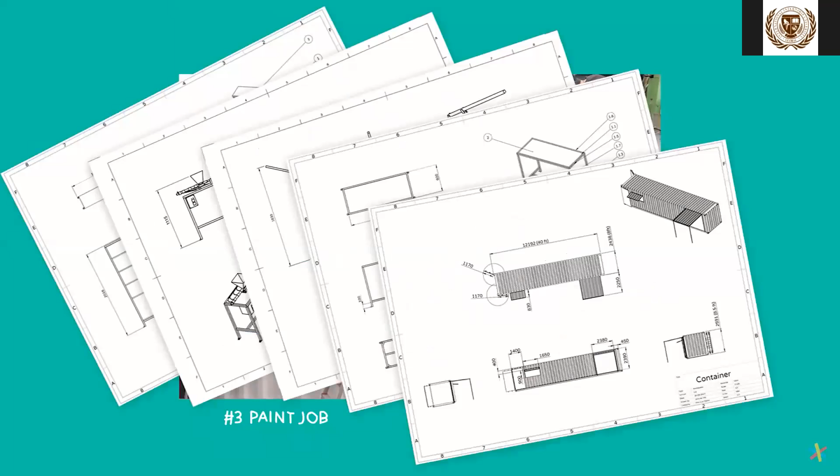We are Precious Plastic and we don't like waste. So we made an entire plastic recycling workspace inside an old shipping container. It contains all the tools and machines to turn plastic waste into valuable things. Plastic is collected, shredded and turned into something new, all inside the space. This workspace can turn plastic trash into beautiful bowls in any color, or strong wall grips. With precise molds, it can make precise objects. Or simply make any wall more beautiful. Make beams and construct a big tower, or start small with a jewelry collection. This workspace can be set up all over the world. Plastic trash goes in, valuable items out. We share step-by-step instruction videos and all the technical drawings to build this workspace yourself. Open source, online, for free. Plus tutorials, a big community of helpers, plus an online marketplace to buy and sell products. So people from all over the world can set up a little recycle business. We created a map where people can collaborate and find each other. At all fronts, help is needed. Add yourself to our map, find each other and start. Make sure to spread this message around. Visit preciousplastic.com for all the information.

Did you see how it's connecting? I can connect my beautiful lady, woman digital nomad. She will buy my upcycled table from plastic waste. They will make it in the Precious Plastic community. They will make for my design the plate, and that plate I will put here in this area, you see, that is the plate for my upcycled laptop table. And that is the extra value of my table.

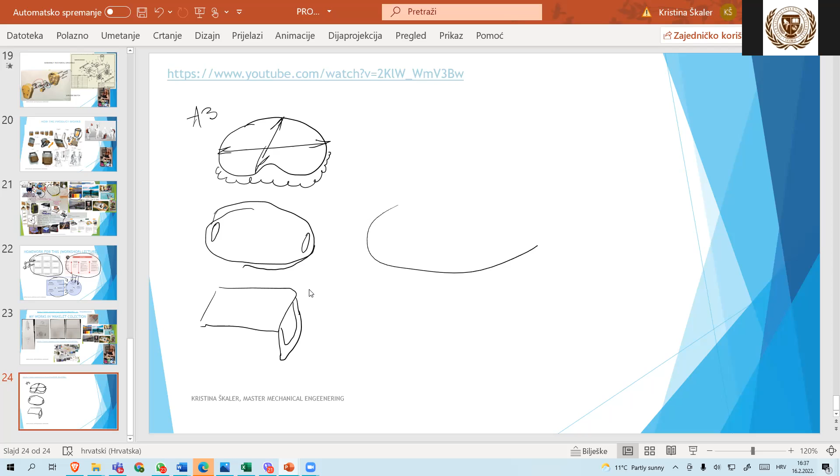Okay, you will put maybe legs here. Let's show, these are the legs here, like this. Maybe you put a hole for the glass here. Maybe you will put here a border so your pencil doesn't go down, or your laptop will be standing here like this.

Okay, and you will put here maybe a hub here for the other devices. Maybe a hole for mobile. Here you will put the mobile phone. Maybe you will put something else. And that is your task for today. Be creative and connect your mind mapping, research the market, connect the information and put it on your paper.

And please, can you share? We will have a presentation on Friday, and we will collect all your papers and make a presentation of your products. But if nobody makes something like this, I will share my students' works. Thank you. I'm finished for today.

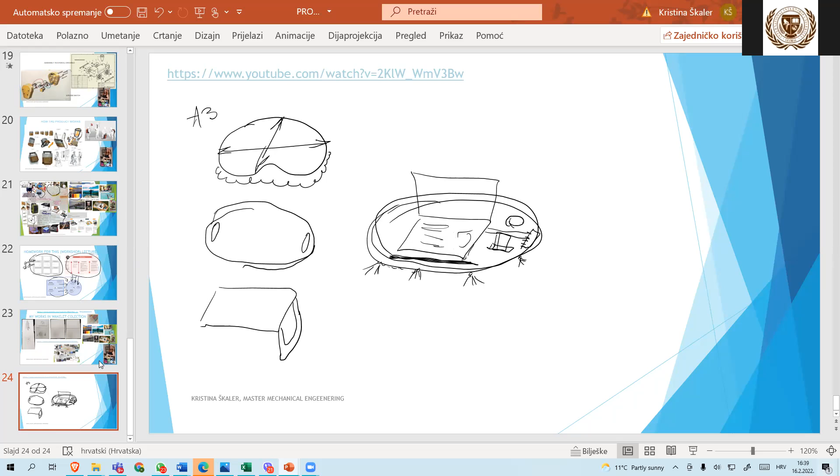Thank you, Kristina. Thank you for your great presentation, for your great workshop today. I'm really excited with these works and with this drawing, to make, as you said, our table. So that is the creating. That is a creation of ideas. That is the aim of our workshop, to make our brain work and to have ideas.

So I'm now sitting and I have my laptop in front of me, but is it in a good position? Am I sitting on an ergonomic chair? Is my table good? There are many questions if we talk about that kind of table. So I have a picture of my table in my head, different, but I don't have it yet. So everybody can make this work.